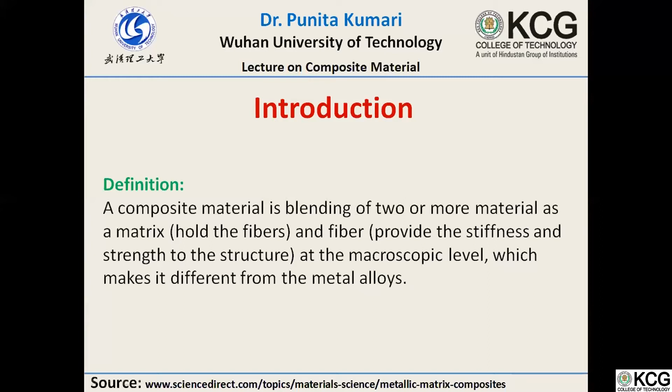So today I will be giving a lecture about composite materials and industrial applications. In the introduction, first the definition. What is a composite material? It is a blending of two or more materials at a macroscopic level. Macroscopic makes it different from metal alloys. The two materials are the matrix and the fiber. The matrix holds the fiber together, and the fiber provides stiffness and strength to the structure. That is a common definition of the composite material.

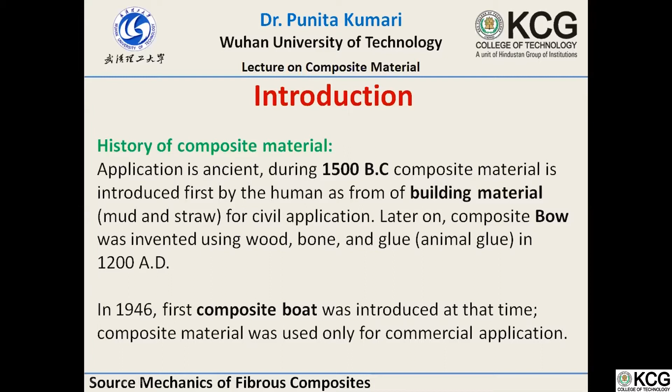And the history of composite material: we started using composites in 1500 BC. At that time, humans built their homes as a civil application using mud and straw, and later they made a bow of wood, bone, and animal glue in 1200 AD. In 1946, composite material first came into commercial application, when the first composite boat made of glass fiber was introduced. That's the first time.

Composite materials have several advantages that make them different from metals or metal alloys. They give high strength, high stiffness, high toughness, high corrosion resistance, high wear resistance, chemical resistance, good environmental resistance, high fatigue life, and thermal insulation. So there are several advantages of the composite material.

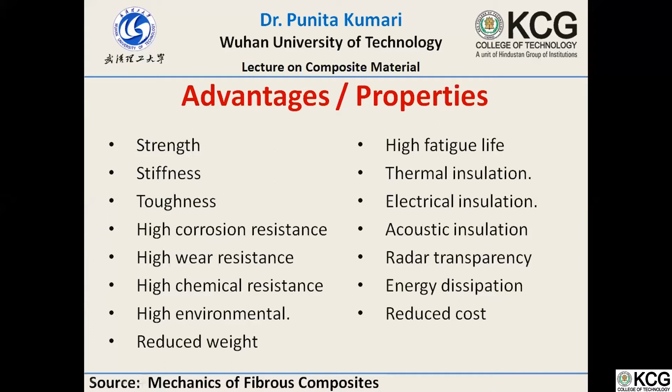Apart from these advantages, composite materials also have several disadvantages, listed here. Tooling, like drilling, making holes or any kind of CNC operation, is very difficult in composite material. Hidden defects are very difficult to inspect, and they need skilled people to do that job. That's called non-destructive testing, and it needs very skilled people to conduct the testing or inspection. These inspections require special tools, and the raw cost of composite material is very high.

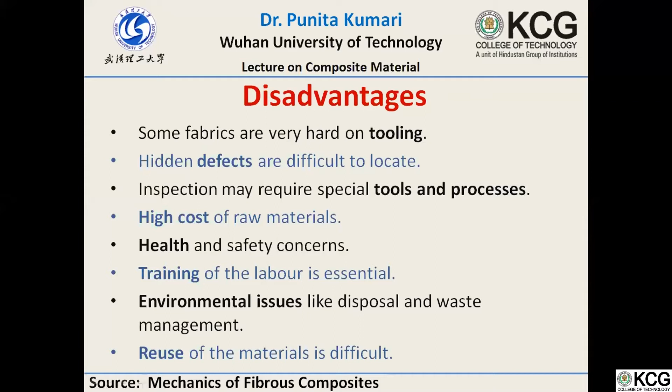It's hazardous. It's not reusable, that's one more problem. Apart from this, there are several environmental issues also. If you are using carbon composite, you need prepreg made of carbon fiber that needs to be stored in frozen places. That's also very expensive, so it's not cost effective at all.

It also requires extreme cleanliness, because when you're manufacturing the composite, if any dust particle goes inside during manufacturing or fabrication, it will degrade the strength or the stiffness of the composite. And the composite product is very brittle, so it's easily damageable in some cases, such as when we use carbon fiber alone.

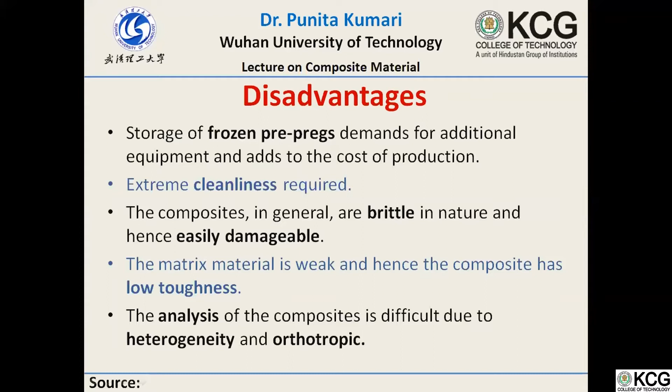And analysis is very difficult for heterogeneous and orthotropic composite materials. That's also one major disadvantage of composite material. Analysis of unidirectional fiber is easy compared to orthotropic composite material.

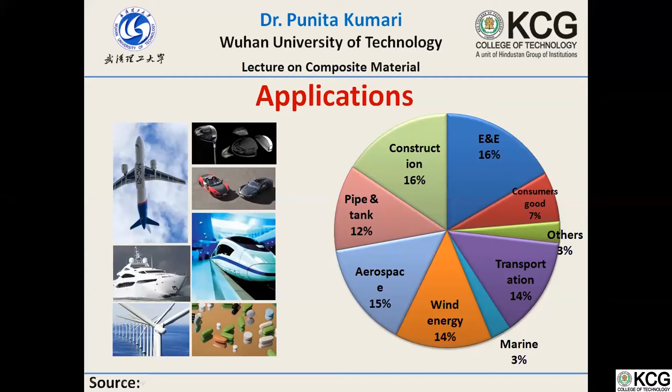The applications. Recently, composite material has been used in construction, 16%. Electrical and equipment is 16%. Pipe and tank is 12%. Aerospace is 15%. Wind energy is 14%. This is the market share data in the composite material field.

In the aerospace industry, composite material is used very widely. 53% of the structural parts of the Airbus A350 are made of composite material. Airbus chose this material because it's very lightweight, and they conducted a survey in which they found it reduced fuel consumption by 16% per passenger compared to any other aircraft. That's one major advantage of using composite material in the aviation field.

Apart from this, in the early 1940s, composite material was used in radar domes. After that, it was used in the vertical tail and elevator. As time passed, it was used in secondary structures such as the rudder, trailing edge, and leading edge of the aircraft. As the years pass, the application of composites in Airbus has increased. Now it is 53%. Maybe in the coming years it'll be 70% or 80%.

So that gives a very big idea of why we need to learn about composite material and its applications, and why we need to conduct lots of research about lightweighting and fuel consumption, because the market is very big for composite material.

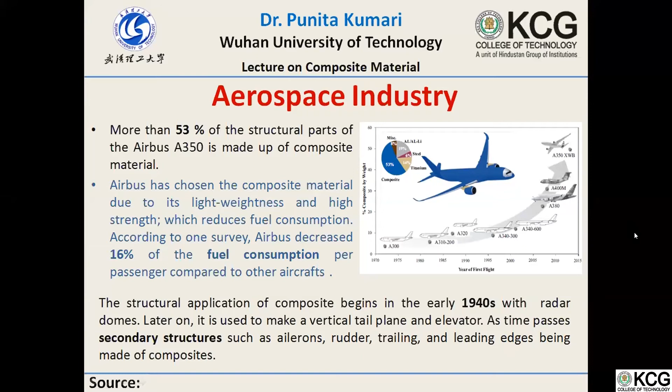In the aerospace industry in India, the Tejas combat aircraft is made of composite. Kevlar composite is used in the nose cone, glass fiber composite in the tail fin, and carbon fiber in the fuselage and the wing of the aircraft, apart from the control surfaces of the wing.

And in the Indian helicopter Dhruv, that is also made of composite material. Carbon fiber composite is used for the rotor blade, tail rotor, vertical fin, stabilizer, cowling, radome, doors, and cockpit. So these are the two best examples of planes made of composite material, because of its lightweight and high strength.

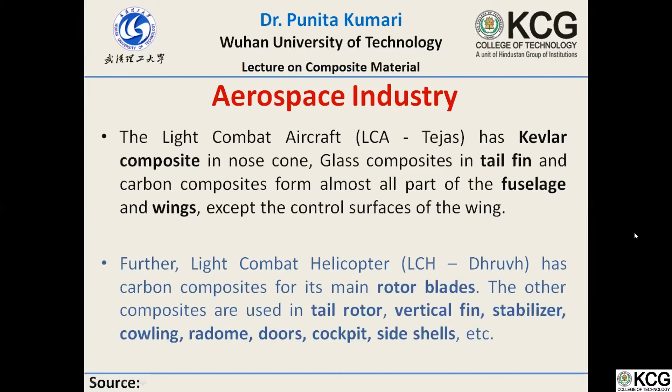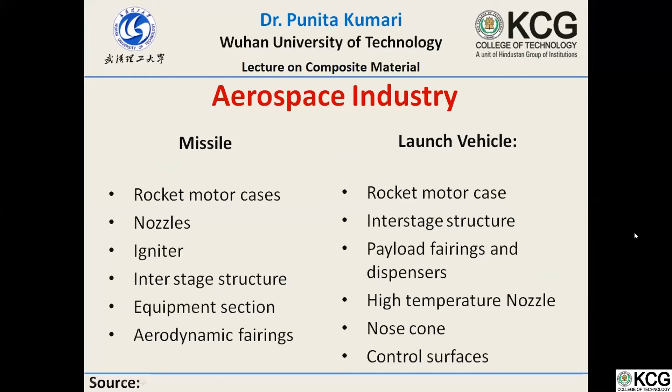Apart from this, in the aerospace industry, composite material is also used in missiles and launch vehicles. In the missile, the nozzle, igniter, equipment section, and rocket motor case are made of composite material. In the launch vehicle, the rocket motor case, payload fairing, dispensers, high temperature nozzle, nose cone, and control surfaces are also made of composite.

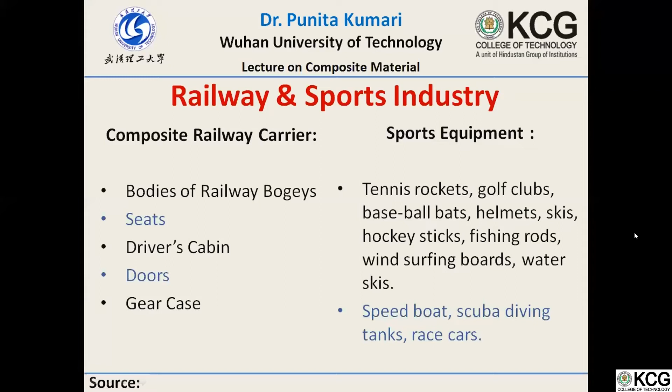In the railway and sports industry, the body of railway bogies, including seats, driver cabin, door, and gear cases, are made by composites. And in sports equipment, there are lots of things made of composites, such as tennis rackets, golf clubs, baseball bats, helmets, skis, hockey sticks, and fishing rods. This kind of sports equipment is made of composite material.

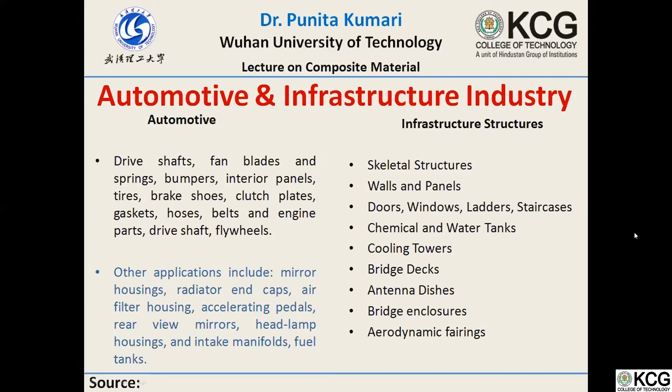In the automotive sector, composite material is used in drive shafts, fan blades, springs, bumpers, interior panels, tires, brake shoes, clutch plates, gaskets, hoses, belts, and engine parts, including radiator caps and air filter housing. In structures, it is used in skeleton structure, walls and panels, doors, windows, ladders, staircases, cooling towers, bridges, and decks. These things are made of composites.

In industry, conveyor belts, hoses, puncture resistant fabric, rotor vanes, ropes, and cables are made of composite. In medical too, there are several things made of composite, such as wheelchairs, hip joints, and heart valves.

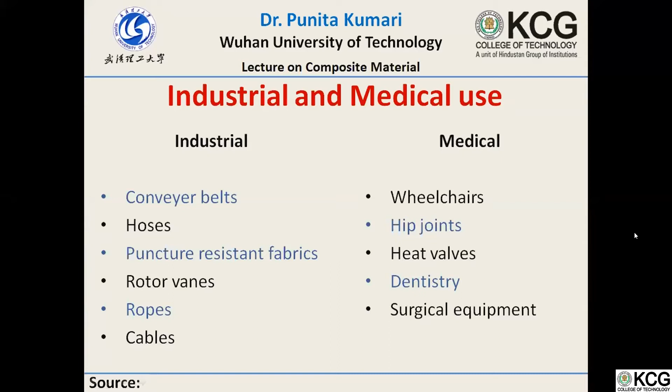Dentists use epoxy resin, which is not health hazardous. They fill it between the two teeth, so they use epoxy resin. And surgical equipment is also made of composite material.

If I talk about electronic equipment, chips, the electronic chips, are made of composites, as well as electronic packaging material, such as styrofoam, and there are several other kinds of things made of composites.

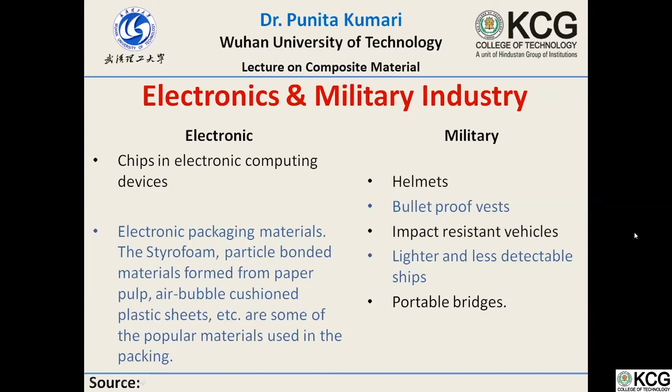On the military side, helmets, bullet proof vests, impact resistant vehicles, lighter and less detectable ships, and portable bridges are made of composite material for military application.

In marine applications, ships, boat hulls, instrument panels, hydrofoils, hovercraft, propellers, propulsion shafts, rudders, heat exchangers, and flywheels are made of composite.

In wind power engineering, the rotor blade, including blade shells, webs, spar or box structure, and generator housing, are made of composite in wind power energy. So these are the several examples that inspire us to learn and do more research about composite material and its applications in industry.

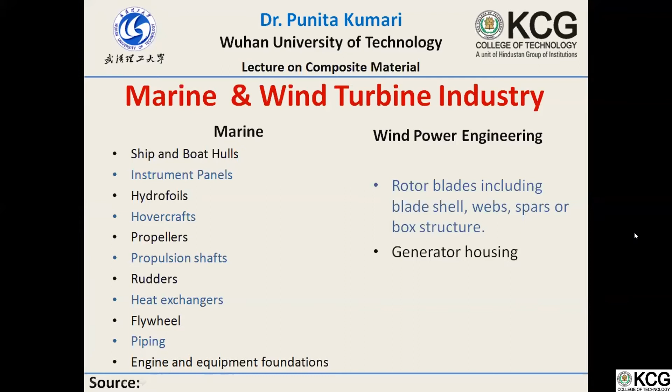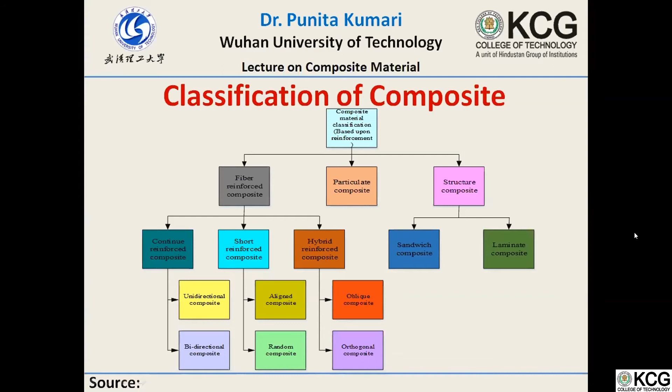What is the purpose of reinforcement in the composite? It carries the load and transfers the strength and stiffness from the fiber to the matrix. That's the main job of reinforced material in the composite. For example, there are several reinforced materials, such as carbon reinforcement, glass reinforcement, alumina reinforcement, and aramid reinforcement.

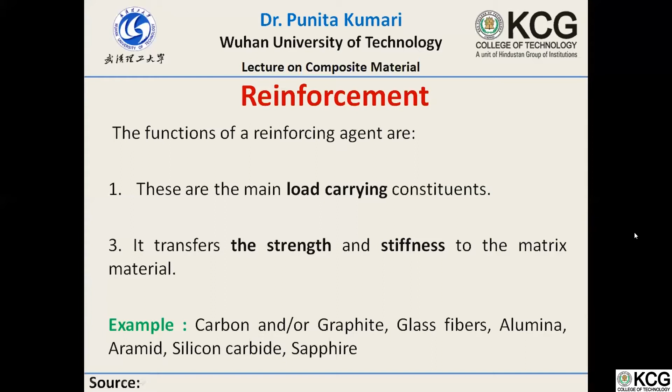In the matrix, that material holds the fiber together and transfers the load uniformly between the fibers. It also provides protection to the fiber from environmental effects, and gives a good finishing to the product after manufacturing. There are several kinds of matrix available in the market, such as epoxy resin, vinyl ester, and plastic resin.

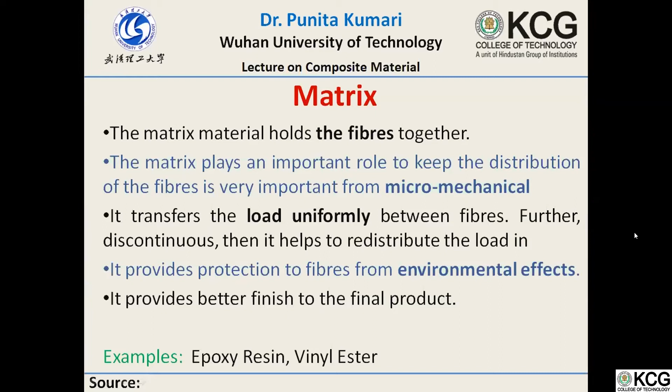This is the general diagram I have plotted here, showing the reinforcement and the matrix. The white part is shown as the matrix, and the blue part is shown as the reinforcement. This long wire is the reinforced fiber, which is unidirectional and continuous. That's why this kind of composite is called fiber composites.

On the other side, when you cut the fiber into small pieces and embed it in the matrix, that's called short fiber composites. This is the second type. The third type is not round; it's made from powder of the fiber mixed with the matrix and manufactured that way. This type of composite is called particulate composites.

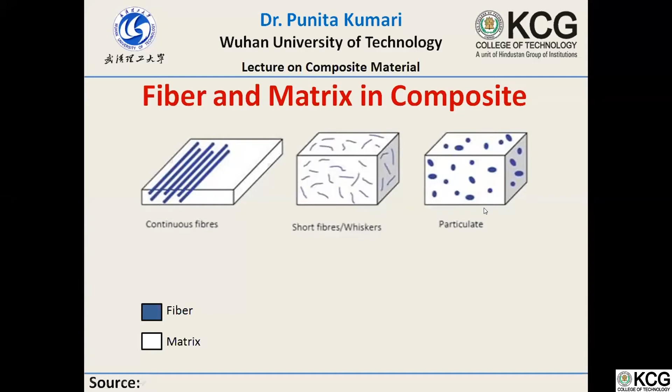Based on the shape, there are several kinds of fibers available. The circular shape fiber, such as glass fiber or carbon fiber. Elliptical shaped fibers, for example alumina. Triangular shape, for example silk or silicon carbide. Hexagonal shape is sapphires, rounded triangular shape, and kidney bean shape as carbon. Trilobal shape is again carbon. Carbon fiber has several kinds of types and different shapes also.

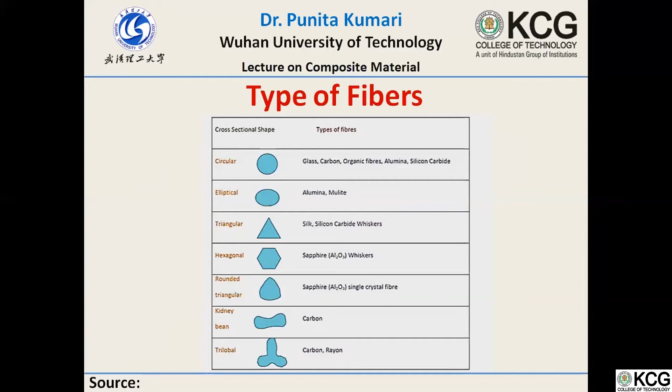As I said previously, the difference between thermoplastic and thermosetting matrix. The thermoplastic is not a permanent based matrix, whereas thermosetting is a permanent based matrix. In thermoplastic, when you apply high pressure or high heat, it can deform or soften, so you can remold this kind of resin or matrix. On the other side, thermosetting, if you apply more heat or more pressure, it will decompose, and it's very difficult or almost impossible to remold it again.

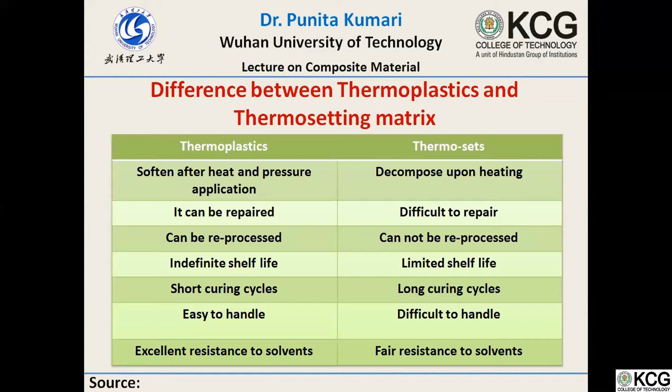The thermoplastic is easy to repair. On the other side, thermosetting plastic is very difficult to repair because you cannot provide more heat; if you do, it will melt or change shape. Thermoplastic has indefinite shelf life, whereas thermosetting has limited shelf life, so after a certain time you cannot use the thermosetting matrix. The thermoplastic is easy to handle, whereas the thermosetting is very difficult to handle.

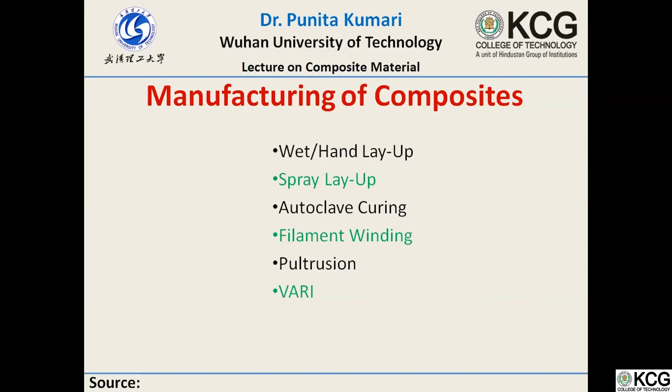For the manufacturing process of composite materials, there are several processes or methods, but I have listed a few important ones: wet and hand layup, spray layup composite, autoclave curing, filament winding manufacturing process, pultrusion process, and vacuum assisted resin infusion method. First, I will discuss the wet and hand layup method.

Then apply the gel coat. The gel coat is applied because it makes it easy to demold the composite once the curing process is done. Then apply the fabric of the fiber, whether glass fiber or carbon fiber. Then apply the resin, use a roller and make it uniform; the resin should be uniform. Then apply the fabric again, based on the thickness needed — you can make layers like 15, 16, or 20 layers.

It depends on how much thickness you want. After that, just leave it for 12 hours or 24 hours, depending upon the resin curing time. This curing time is given by the manufacturer, because they know when the chemical gets cured.

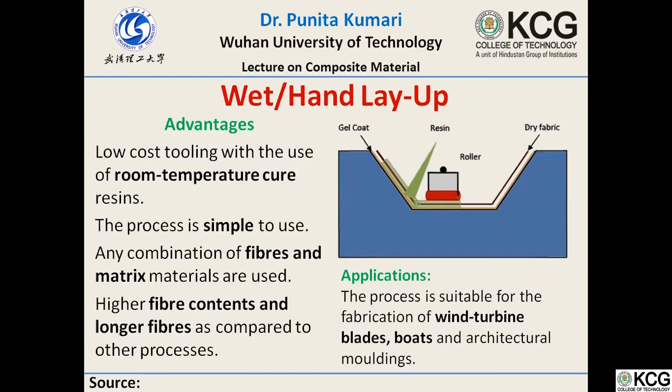There are several advantages and disadvantages of this hand layup process too. The first advantage is the whole process is done at room temperature, so it's very easy to handle, simple, and low cost. Any kind of fiber and matrix can be used in this process. The disadvantage is that on the mold side, the surface of the fabricated composite is very smooth, while on the other side the surface is very rough. So that's one disadvantage, and this is an open process.

There is no covering applied, so this is the open process. That's also one of the major disadvantages because it's hazardous.

We need to make the resin uniformly distributed in the fabric, so we need skilled people with at least 3 or 4 years experience to do this kind of work easily. So this is one more disadvantage.

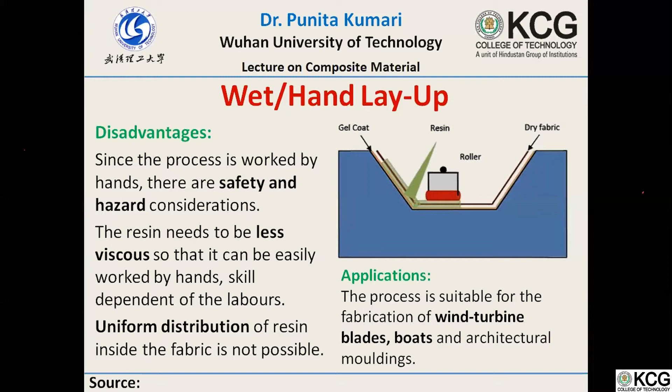Application of this kind of manufacturing is used in wind turbine blades, boats, and architectural molding.

The other one is spray layup. In this process, this is the port of the vessel, this is the fiber spool, and the resin is applied here. One nozzle has the resin, another nozzle has the fiber, and it's chopped fiber, not continuous fiber.

First we need to clean the surface, then apply the gel coat, and after that make a uniform deposition of the matrix and fiber on the mold, and leave it according to the manufacturing guidelines. After curing, you can take it out.

The major advantage of this process is it is easy and very cost effective. On the other side, the same problem we get: the mold side is very smooth, whereas the other side is very rough.

There is one more disadvantage: it's very difficult to control the fiber and resin volume, because the nozzle sprays the same amount of fiber and resin at the same time. So it's difficult to control, and we need skilled people to do this if we want it to be uniform.

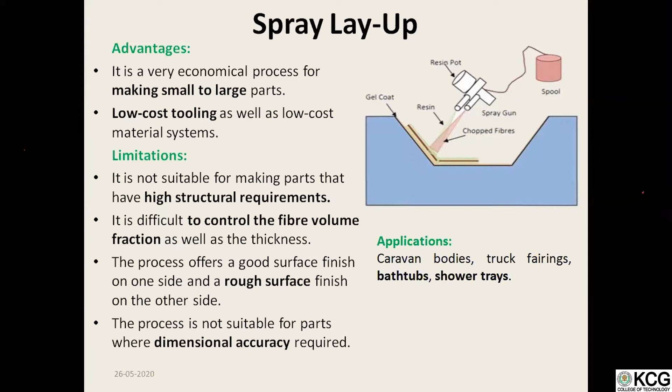The autoclave curing manufacturing technique - I'm very familiar with this process because I have done my thesis on it. This is mainly used in aerospace and automobile parts.

First we need to clean the surface, which is very important for all manufacturing. Then apply gel coat, then a breather coat, and we need to assemble all the fibers. It depends on which orientation you want to give the fibers, like if you're using unidirectional fiber, it depends on the orientation you want to provide.

After that, cover it with the peel ply or breather cloth, then seal the whole setup with the vacuum bag and create a vacuum inside the setup.

After that - I have used carbon prepreg, and according to the manufacturing guidelines, they give a certain temperature and pressure. We need to cook at that certain pressure for a certain time, otherwise it will get spoiled. So we need to keep this in mind if we are doing the autoclave process.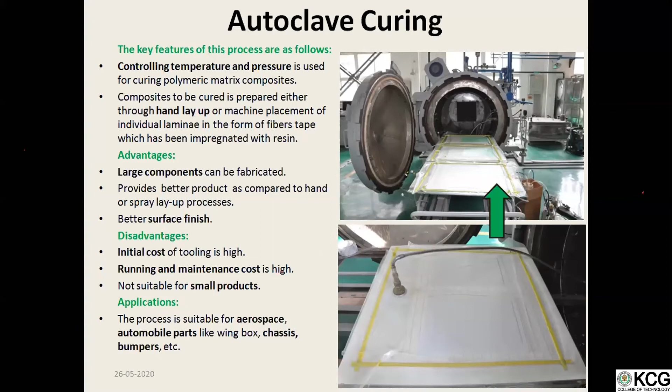So that's a disadvantage, because whenever you want to use a different design, you need to program. That's the disadvantage of this process. Another disadvantage is, towards the mandrel side, the surface is very smooth, and outside is very rough. So that's also a disadvantage, same as the hand lay-up process and the spray lay-up process.

The advantage of the filament winding method is the resin content used is very controlled, and the fiber used is also very controlled. It's a very fast process. If you want to make a 1 meter pipe, it will take around 1 hour or 1.5 hours. It's economical because it takes very little time.

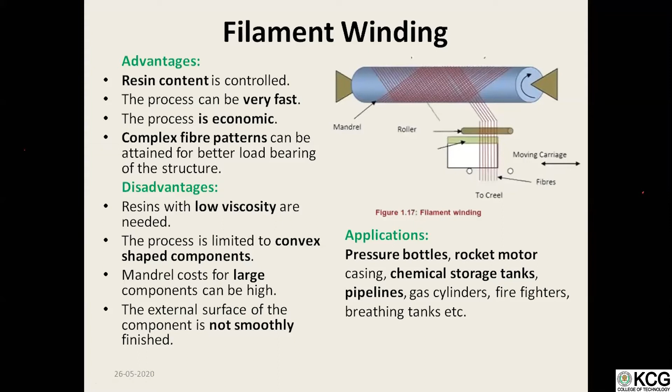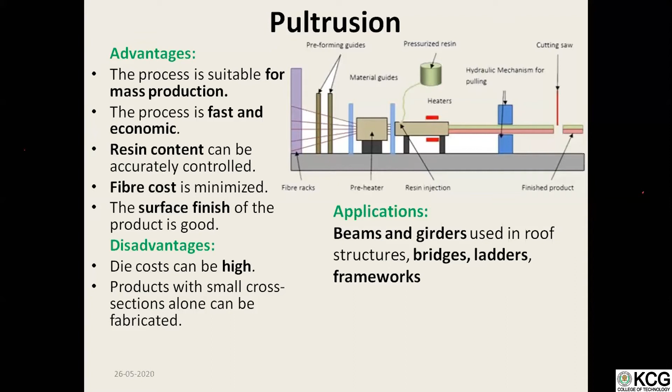The disadvantage: if you are using only plain fiber, plain composites, it is easy. But if you are using any kind of die or molding, then it is very expensive to use this kind of process. It is used in beams, ladders, bridges, and frameworks. Mostly this kind of manufacturing is used for civil works.

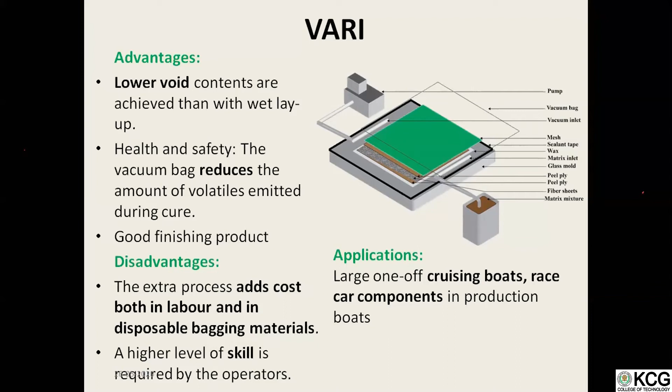So after the manufacturing, we will be talking about non-destructive testing. There are several inspection methods available, but I have listed a few methods that inspect and detect the flaw or the damage that has occurred in the laminate or the composite. So NDT, non-destructive testing, can locate or measure the flaw length or area, or it can tell you the coordinates sometimes, where the damage is.

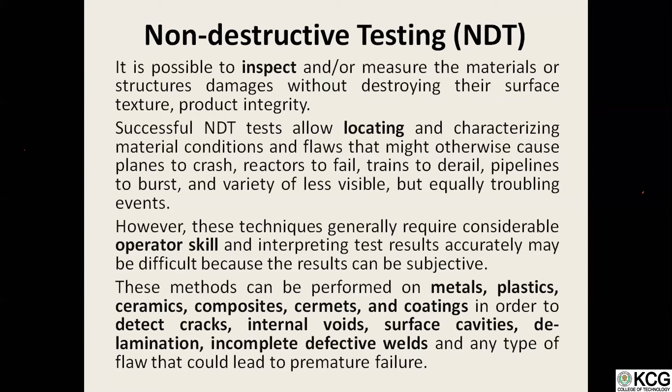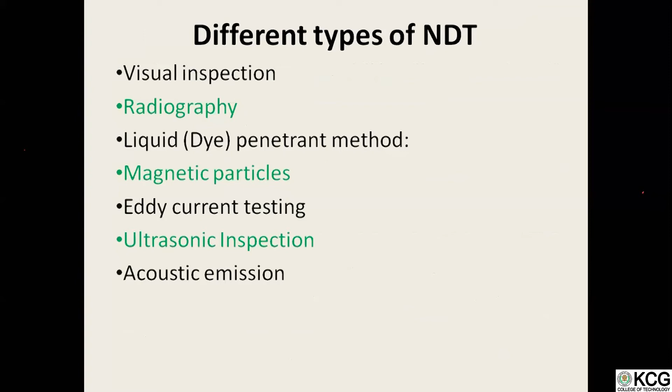In this visual inspection method, the damage can be visualized through a microscope or by the naked eye. So damage is in the form of any cracks or any voids that appear on the surface, or any kind of holes, or delamination on the upper surface, just the upper surface.

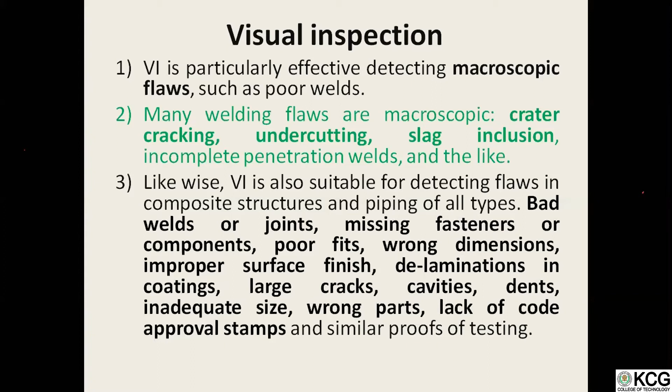Radiography, this kind of non-destructive testing, is used to measure the dimension of the crack that occurred between the layers of the composite plate. So it will tell the dimension and the location of the damage when you are doing this kind of testing.

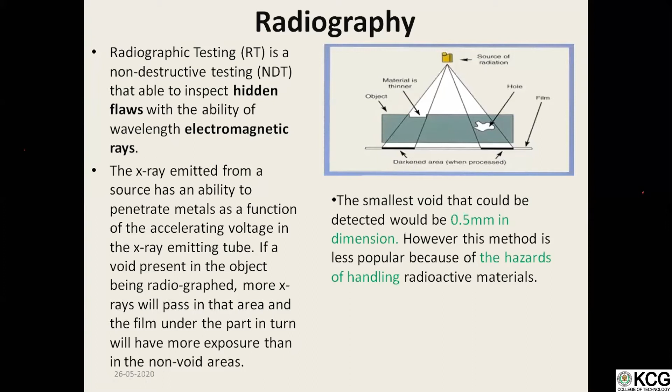So the penetrant is basically a very fluorescent color, either red or green, and after that we need to remove the penetrant from the surface with a cloth or any kind of tissue paper. After that, we need to apply the developer. So now the penetrant has a tendency to come out when the developer is there. And after coming out, we can easily identify if there is a dent or any crack.

So one thing we need to keep in mind, the developer is very light in color, either gray or white, but on the other side the penetrant is very bright or fluorescent in color. So this NDT method is used for all kinds of materials except porous material, because porous materials already have lots of cracks, so we cannot use the liquid penetrant method for that. Other than that, it can be used on non-magnetic or magnetic material.

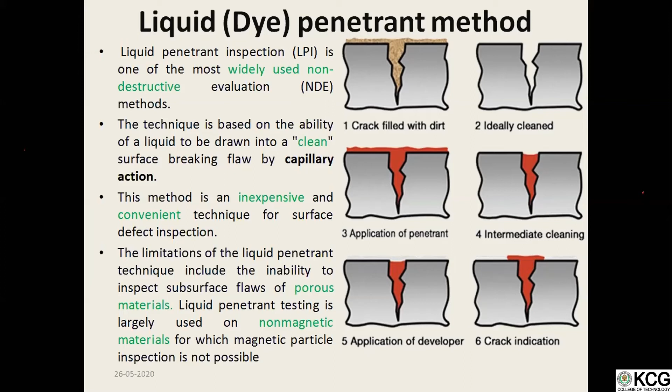The advantage is it's inexpensive and easy to handle and easy to do. So it does not require any highly skilled people to do it. So this process is very easy. The magnetic particle.

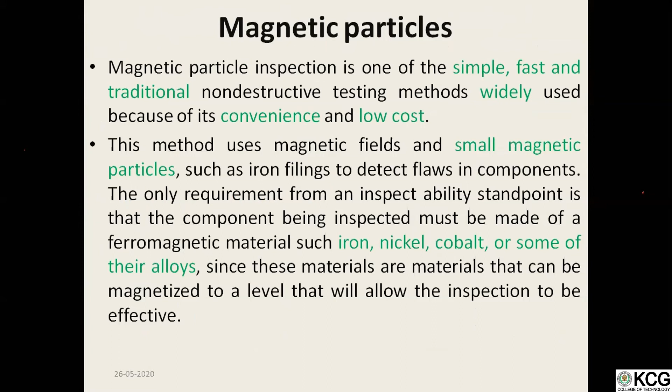This process is very fast and simple, but the problem with this process is it's used only for ferromagnetic material, that is iron, nickel, cobalt, and a few alloys made of these materials. So first we need to clean the surface, then apply the magnetic flux, which will generate, if a crack is there, a north and south pole.

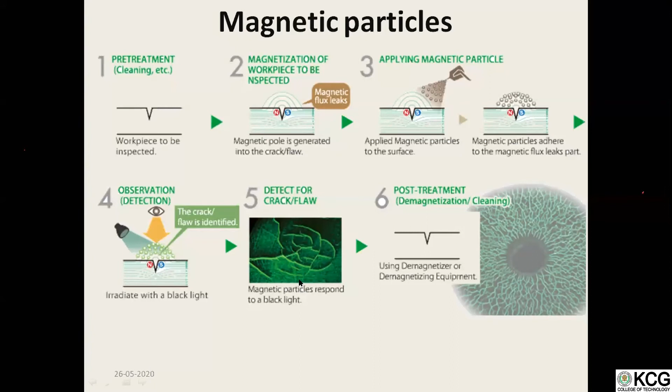And the sixth one, we need to again clean the whole surface to prepare the repair, because once we know the damage is there, we need to do the repair. This is one more NDT test, that's eddy current testing. This is used for conductor material. Basically, it's used for copper or iron, any kind of conductor material.

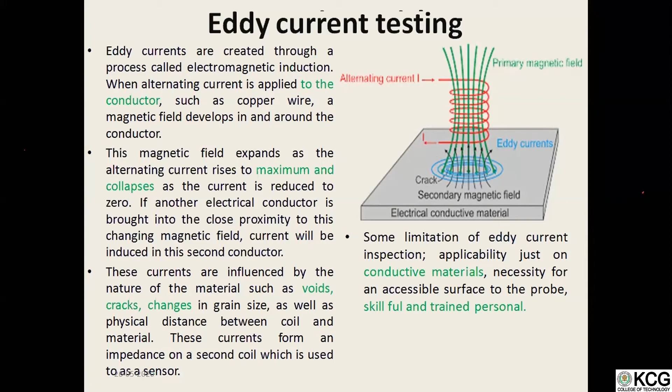So it can detect voids, cracks, or change in the grains. If in this place there are some small grains, and in this place some big grains, there is a defect because of the size difference. So this eddy current testing easily identifies those kinds of defects in the conductor. As I said, this is the limitation: it's used only for conductors, and it also needs a skillful person to do this NDT test.

Ultrasonic inspection method. In this method, one probe is used. I have done this ultrasonic testing for carbon fiber. So I know here, the tank is filled with some kind of medium, either oil or fluid grease or water, and the composite component should be placed or submerged in the water, and this probe is allowed to move in all three directions, x, y, and z.

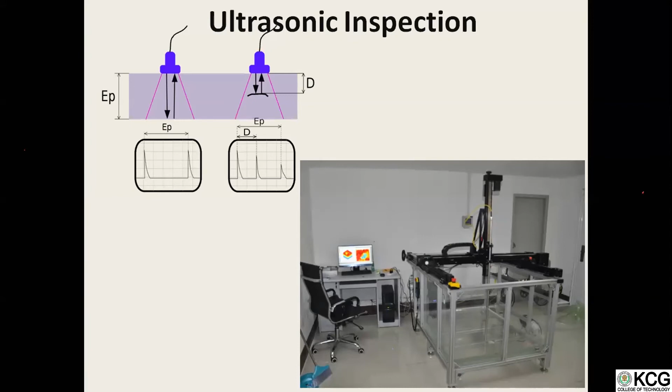It can be used for carbon fiber, but carbon fiber made by the autoclave manufacturing process, because that process provides high heat. It will melt all the resin, and it's uniformly distributed among the fibers and the whole prepreg. So there is no chance of voids or any defects. So basically ultrasonic is used for carbon fibers made by the autoclave process.

So it basically gives the sound wave from the composite when the load is applied. Otherwise, it won't work. So acoustic emission is basically an online process. When you apply the load, it will give you the readings. If you don't apply the load, there is no vibration and no defects show.

That's one disadvantage of this process. Another disadvantage is this kind of process is used for the small panel. It is not used for the big panel. On the other side, ultrasonic is used for the big panel too.

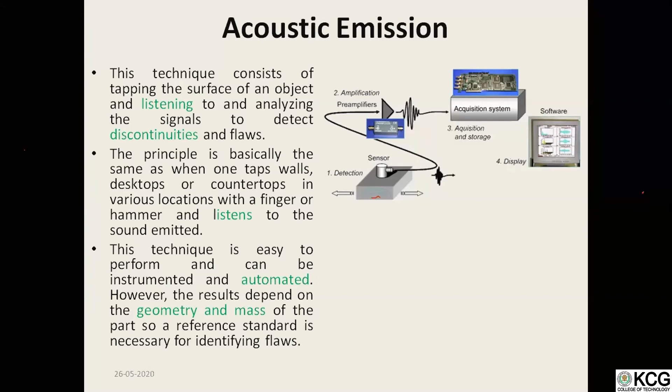After the NDT test, the repair of the composites. We need to do the repair because, suppose we are using a composite material for 5 years, and the life of the composite is 10 years. So still 5 more years is remaining in that component. But since it gets damaged, simply we replace it.

But if we know that repairable composite material gives another 4 more years or 5 more years, why not repair that and save the cost, the man cost and the material cost? So for that reason, the repair of the composite is nowadays in very high demand. Composite repair has several types. I will state a few. Cosmetic repair, resin injection repair, external bonded repair, external bolted patch repair, scarf repair, and stepped repair.

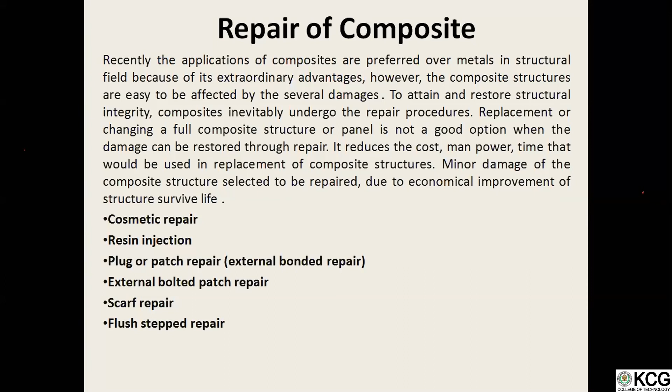So in cosmetic repair, this repair is used when the surface has small cracks or small holes, the upper surface of any component of the composite. So we can simply apply resin or any glue to cover up those kinds of defects. The second one is resin injection. This kind of repair is used when the defect lies between the first or the second layer of the composites.

But when the defect is at the depth of the composite, we cannot use the resin injection, because it just injects the resin via syringe. It does not fully clean the defect area. So this is used when the defect lies at the surface or just inside the surface, in the first layer or the second layer of the composites.

The other method is external bonded repair. This method is like a temporary method. This is not a permanent method because we just need to do the surface preparation and paste one bonded repair. Just paste one more bonded layer. The patch is nothing but the same architecture panel that is used for the parent material.

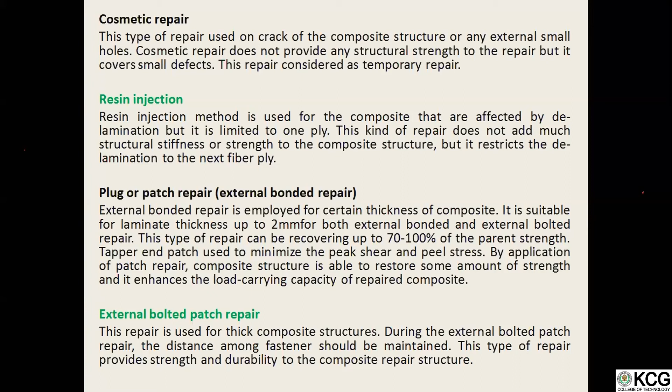There's one more disadvantage of using external bolted repair. It does not provide the aerodynamic surface or the smooth surface that is required for car racing and the aircraft. So for that purpose, we don't use this kind of repair.

And the other repair is scarf repair. This kind of repair is generally used for the aerospace field or the aircraft. So we need to make a scarf at the damaged place, or a taper edge to the damaged place, and we need to make a patch with the scarf angle, and we need to attach them together by glue. So we need to do the surface preparation, and we need to make the scarf.

So this is the disadvantage of the scarf repair. Other than that, scarf repair provides a smooth surface, and that's very good for aerospace applications, like rocket applications and the airplane.

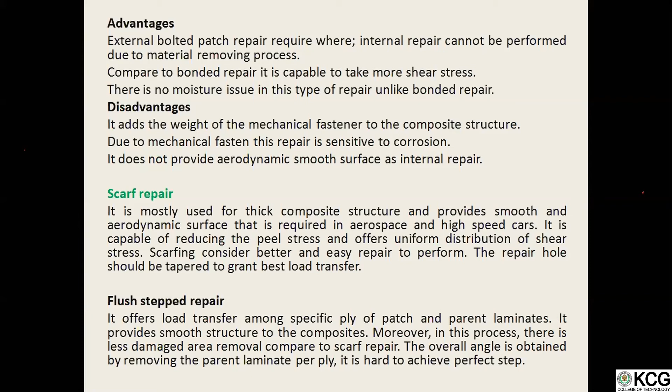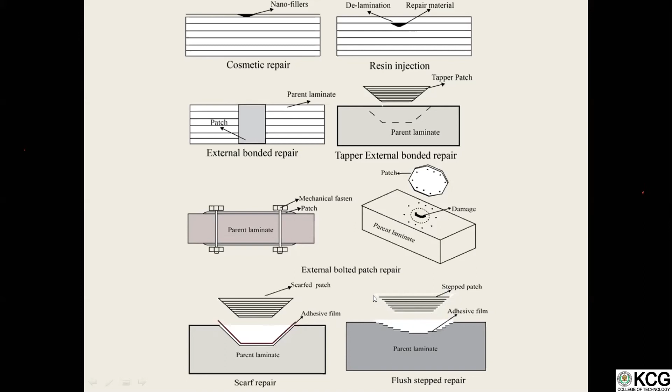So in the numerical analysis, there are several softwares available in the market to perform numerical analysis. ANSYS provides two software, one is APDL, and another one, I forgot the name, Workbench, I think. Yeah, Workbench. But Workbench does not work with composites on its own. For that, you need to

interface with ACP. If you have ANSYS, you can use APDL for the composite material. It gives very good results that agree with your experimental studies also. Then if you have Workbench, you can combine it with ACP, and you can do the analysis of the composite. And there's one more thing.

In ANSYS, if you want to predict any kind of damage, for prediction, not for experimental confirmation, then you need to interface with MATLAB. So ANSYS supports MATLAB, whereas Abaqus supports Fortran or VUMAT. So if you're using Abaqus, you can work with shell elements or continuum shell elements. But if you want to use 3D composite material, you need to have at least knowledge of Fortran and how it works.

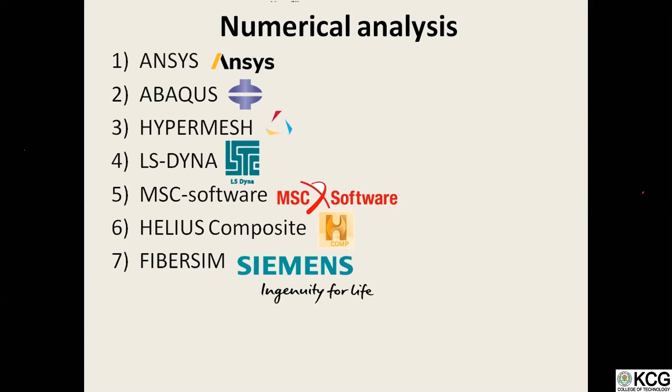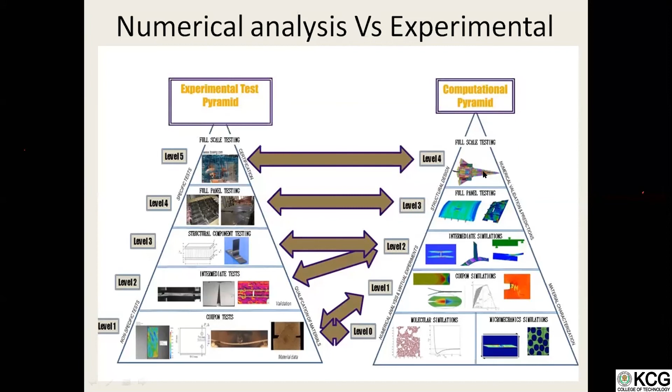The same thing applies if you are doing numerical or computational analysis. First you need to do micro scale simulation, then the coupon simulation, the intermediate simulation, and then it goes to the panel testing. Then this is the final product. So in this one it's a jet aircraft. Again the same thing for the aircraft, and this is for a car.